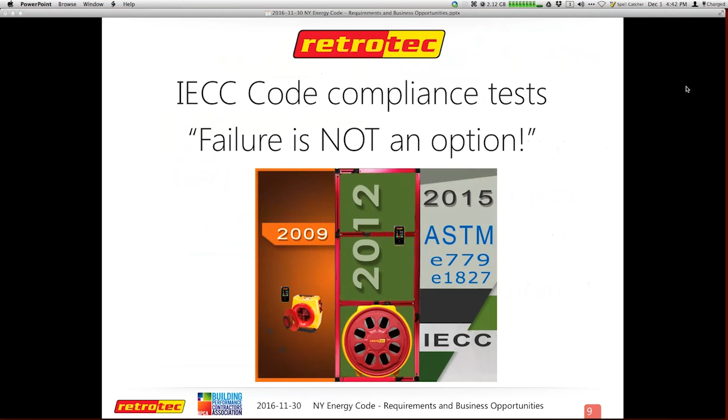Who can perform the test? That's a very gray area and would be dependent upon your code official. What are some of the requirements? How to do compliance, duct tests, envelope tests, and intermixed in that is some air barrier stuff. And we'll talk about how the envelope tightness tests, the blower door tests, are completely different from what you may be doing as a home performance contractor.

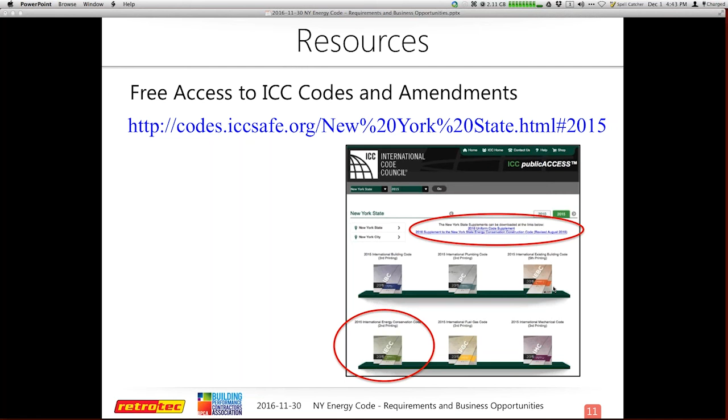If you go to the official ICC, if you just Google ICC codes, you can follow through some prompts. At the top here, I picked New York and the year, and it gives me direct access to any of your codes. So if you're looking for a plumbing code or a fire code, here's your energy code. These are the things that will pop up. And also your supplements have a direct link on this page. It's a nice little resource for you.

This is the most heavy-duty loaded question. I do a variety of training. Actually this morning, I live in Georgia, and we had a code amendment hearing today. I've been to multiple states, and this is always the most difficult question to answer. Only a few states really itemize who these people are - an approved third party. So what does approved mean? And what is a third party, and does any of that actually matter? So this will actually come down to this person here, who is your code official.

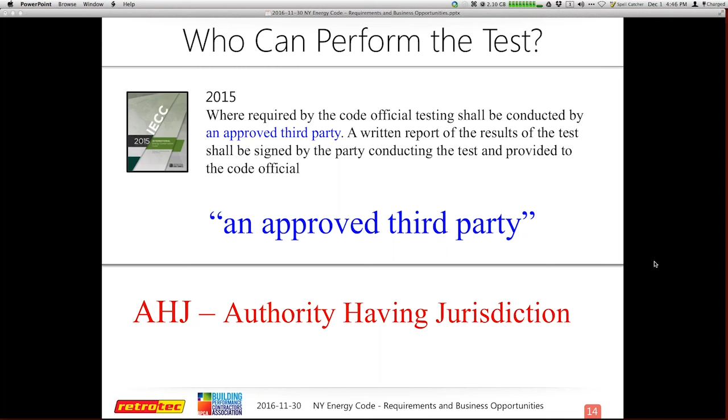All right, so that's actually the one gray area where you want to connect with your building official and find out exactly what approved third party means. There's a lot of places when we get into multifamily concepts where your building official needs to brush up a little bit or be more informed.

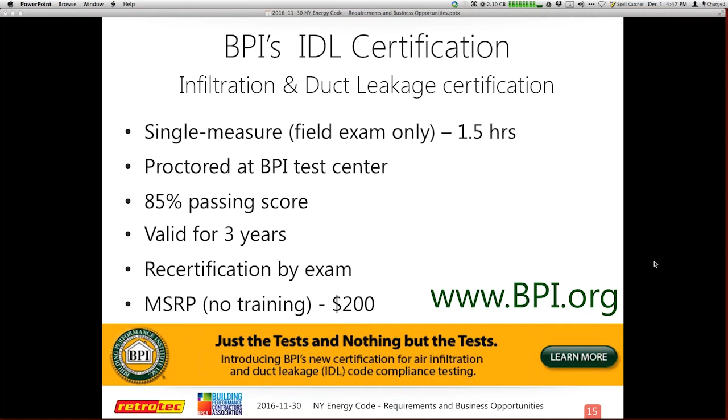One of the most universal ways out there to become a certified individual allowed to do code compliance testing is BPI's IDL certification. Any of the test centers that are out there can do this. I will be up in New York throughout the beginning of the year and throughout next year, offering this for those who need a certification. So any BPI test center can actually do that. So it is an option. It does validate your ability to be technically code compliant, having a certification that shows you can do these tests.

Retrotec does offer this residential, this is the duct tester one. There's also one for blower door. So if you buy a blower door or a duct tester, or if for some reason you have one from a year or two past and you're like, wow, I didn't know you had that, and you want to take the certification course, we can arrange that.

So it takes about an hour and a half, some basic questions, go through a series of slides, the basic online training program concept. But when you're done, you actually get a certification that says, I know how to use this bit of equipment. I do think in the future, this is going to be something that's combined with doing hands-on practical training, and something that confirms you know how to use your manufacturer's equipment.

And it's our goal in the future to be able to try and help provide something that is actually a physical confirmation that you're actually using the equipment, and we can verify that. So coming to a town near you is a follow-up, or the marriage of manufacturer and third-party certification.

Many people are familiar with this concept, but if you're new to the code concept, I want to make sure we understand how the energy code has been working for quite a while, and there's different ways you can comply with the code. And they're described as a prescriptive path. I call the other ones alternative paths.

There's secondary alternative paths when you just get into prescriptive, whether or not you want to just follow the grid, or maybe I want to add more insulation in the walls. I can do a little less in the ceiling. There's a little bit of play even in the prescriptive path, but in general, prescriptive means I do A, B, C, and I follow these sections, R402.1.3. And if I do this exactly, then I actually am passing the code.

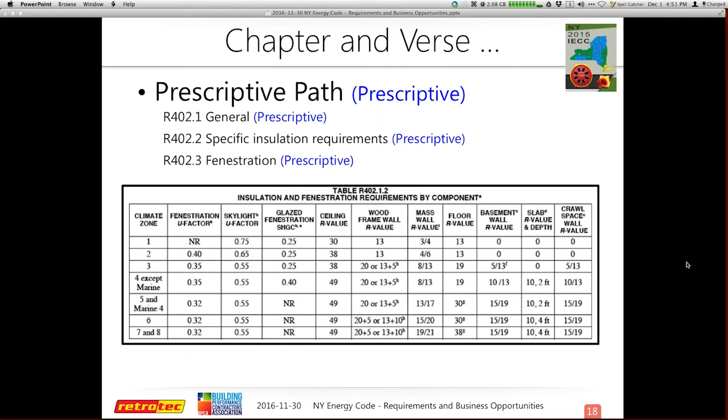This is an example of the prescription that you may follow. This is the prescriptive path, literally the grid. So pick your climate zone; most of you guys are 4 and 5. There may be some 6 in the upper section there, but this is the prescriptive path that you would follow. If I just did my ceiling this way, my walls this way, and my floor like that, then your basement, all those things are laid out, and I can follow prescriptively.

So there's other things that actually show up in the ICC that people always assumed were in an energy code, but are actually either IRC or mechanical code, or your jurisdiction has already overridden this and done something else. So the M is for mechanical code, the R is for IRC.

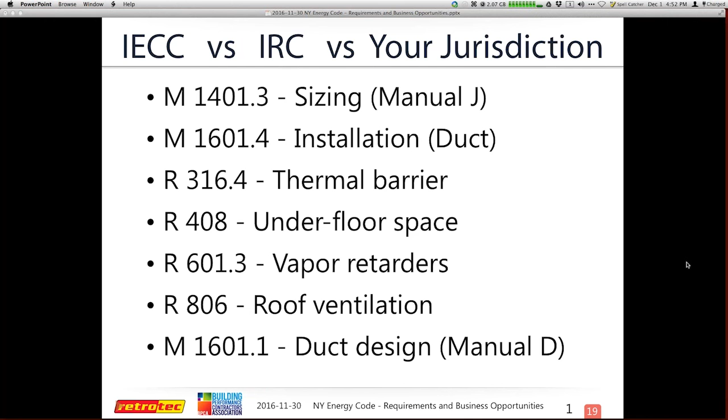So you can see that some of the things you may have thought of as energy requirements are actually in the residential side of the requirements or in the mechanical side of the requirements. The residential usually includes the mechanical as an incorporation, but in general, these are where these are found in subset sections of the code that's outside of the IECC direct code itself.

I'm going to start with duct testing. It's something that some home performance contractors do, so let's use that as a concept.

I do have a couple of polls here. Let me just see if we got something we can reach out to. Let's start with this one. This will give me an idea. How long have you been doing this? So are you new to the industry? Been doing this forever? Some people have been doing it longer. I've been alive, and I'm pretty old actually. So just trying to get a feel.

So someone asked about ResCheck, and as I'm getting my votes coming in, I'll explain what ResCheck is. A free software option that's out there for anybody who's doing energy code. And what it does is it allows you to determine what's the overall U value, or in general R value, for your walls, ceilings, and floors. When you want to follow the prescriptive path, if you want to change it, so instead of doing an R49 in the attic, maybe I want to do an R38, but it means I need to put more insulation somewhere else in the building.

So ResCheck is still out there, and it still allows you to move things around the building. Maybe you're going to go with a higher grade window, and you may do something less throughout the rest of the structure. And that's a compliance path that still is in the prescriptive mode. So that's one of the options that's out there.

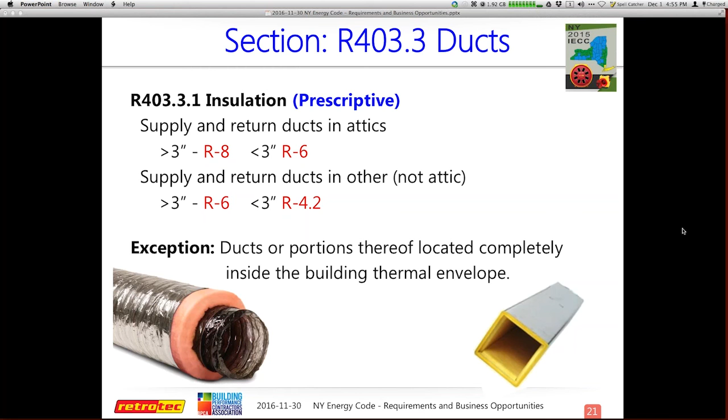So your duct work that's even for your exhaust system must now have insulation, and they describe stuff as being in the attic or not in the attic, and how they describe what R value you have to be and by what size. If you're larger than 3 or smaller than 3, these are the R values. So this was an example of what's prescriptive. So if I follow the ABCs, these are one of the things I have to do for my ducts.

Duct testing is mandatory. All right, so you must test the ducts. All right, but whether or not you're passing with a direct number in the code is a prescriptive option, which means that you don't have to get below a certain number if you're using an alternative path. If I'm using the simulated performance or an ERI, I don't have to have a duct leakage below a certain number. That's actually all incorporated in the software and is done through that path.

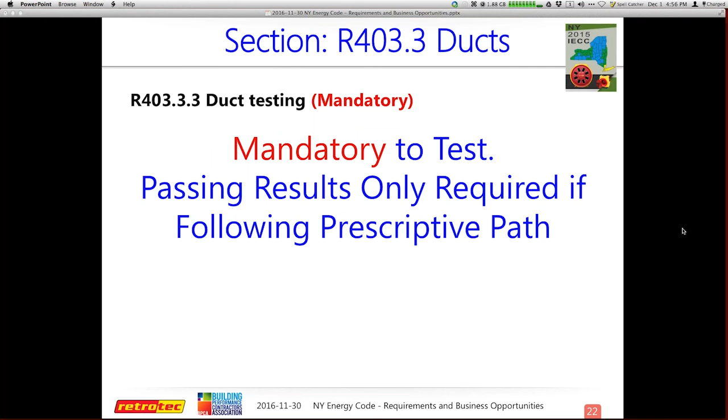But if I am doing prescriptive, I have to test it and be below certain numbers that I have on my next slide. So a lot of people do follow the prescriptive path, and you must have these numbers for compliance. But no matter what, you have to test the ducts. So if somebody says, "Oh, I test them," and they're like, "Well, is it less than 4?" and they say no, you can still pass the code with your numbers being above 4. So it's mandatory to test. Passing is depending on the path that you take.

So my results, if I am doing a prescriptive path, my rough-in with the air handler, without the handler, basically 3 or 4 CFM, or the post-construction test is 4 CFM per 100 square feet. These are common terms that are usually used in the code, or how we describe how leaky something is. You could take out the CFM per 100 square feet and just add a percentage. So that's 4% or 3%. Usually I might say percentage because it's easier to say than CFM per 100 square feet.

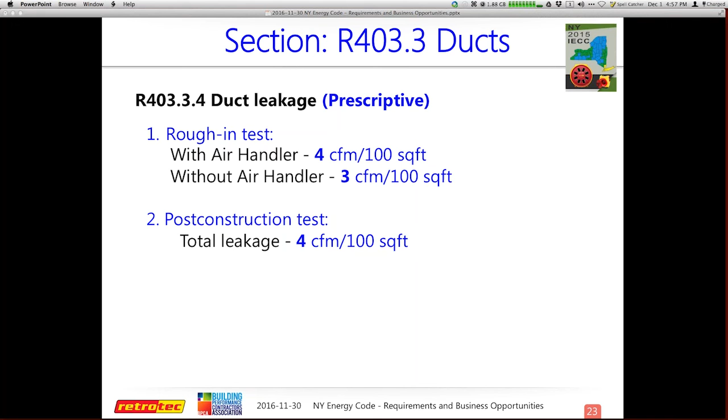But this is the only time where you have to pass this, again, if you're following the prescriptive path for your code compliance. So you may end up with a higher number, but if you're using an ERI, that gets calculated into how they determine how well that house is performing. Any questions on that? Are we all okay on that? So the blower door is a whole other concept which we're coming to.

There is an exception, and the exception is that I do not have to test anything if all of my ducts and air handlers are located entirely within the building thermal envelope. It's not necessarily the conditioned space, but the thermal envelope. So if you decide that you're going to use a spray foam across your roof line, then that's considered to be your thermal envelope. If all of my ducts are inside that area, then I do not have to test it. I still have to seal them. We all recommend that they still be insulated.

The thermal envelope can also be a gray area depending on your code official. So make sure that you understand how he defines the thermal envelope. Usually when the attic is being insulated, usually it's a foam concept, and that is your thermal envelope that they understand that you do not have to test, but don't get caught at the last minute knowing you may not have done a great job of sealing it, knowing you didn't have to test it, and find out you have to do that the day before occupancy.

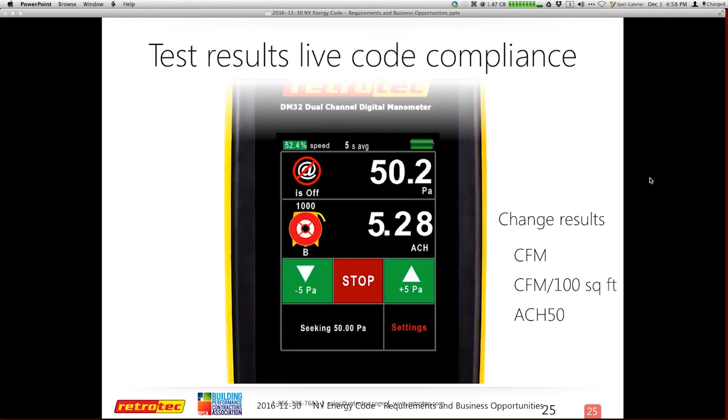Many of the things that we'll talk about, we'll do the code part, and then I'll talk about some of the things that you can actually do with the Retrotec DM32 Smart Gauge. So in the gauge itself, I can get live results. So as I'm doing my test, I can get CFM per 100 square feet or air changes per hour at 50. These are all things that are very beneficial and make your life a lot easier, especially air changes per hour. And we'll go through some of those and how they work.

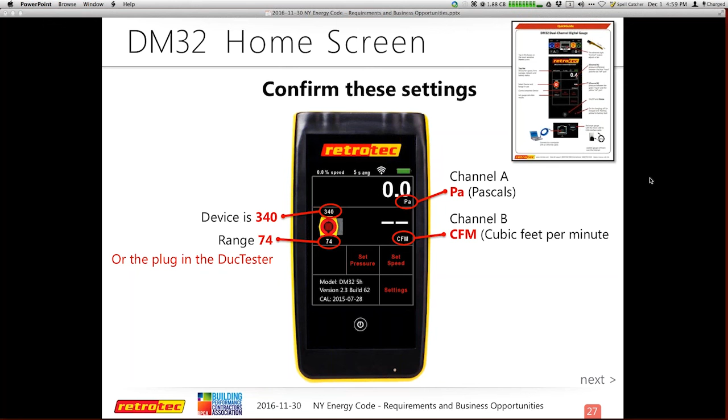So when you turn on the gauge, it keeps your previous settings, and it's as simple as I turn it on. I always want to confirm a few things, that I still have pascals. Nobody else messed with my gauge, but all these things are still there. There's nothing for me to test. I don't have to change a mode. I don't have to tell it to do any type of CFM or enter what type of device. If I did a duct test 3 days ago, then it starts up and says this is exactly what you had when you turned off the gauge. So I always just kind of confirm that I've got the few settings I have.

And to run a test, it's as simple as I hit set pressure. There is a speed control knob on the fans, but for the Retrotec stuff, we just hit set pressure. I enter 25, and after I usually do that, I always turn on the @ feature just as a habit, and I'll explain what the @ feature does to make sure everybody's on the same page. So on channel B, I'm getting my test results at 25 pascals. Sometimes the ducts may fluctuate. Usually they're fairly stable versus the blower door, but here I can actually confirm that my results are 184 CFM at 25 pascals.

One of the ones that's not in the code, but this is an interpretation that's been around for quite a while, is that if I have more than one air handler and system in the house, especially if they're on the same floor, which is common for a ranch home, this was common when I lived in Arizona, wherever air handler one serves, that's the square footage that I'm going to use for compliance versus whatever air handler two is serving.

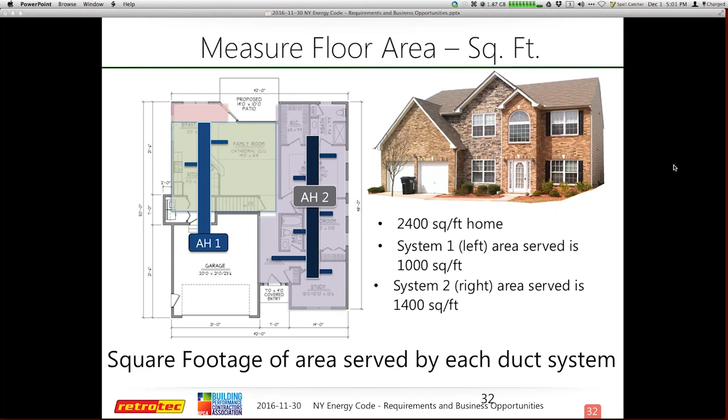They kind of leave it up to the individual for some areas on where the return is. A lot of times the foyer and stair areas can be gray areas. So usually, as long as you make a strong, educated guess, most people aren't going to doubt you. And you can use this to your advantage, because we're dealing with CFM per square footage as leakage. In general, you want to make sure you're not combining the two units as leakage with the area they serve. These are both individual compliance measures, so one may pass and one may fail based on how they actually test.

Here's an example of a post construction test. I'm doing a total leakage test, and I have 107 CFM on my gauge. It's a 2,400 square foot home. So my percentage of duct leak is 107 divided by 2,400, which comes out to 4.5 CFM per 100 square feet. Just to make sure we're on the same page, this is where we get this number of 107.

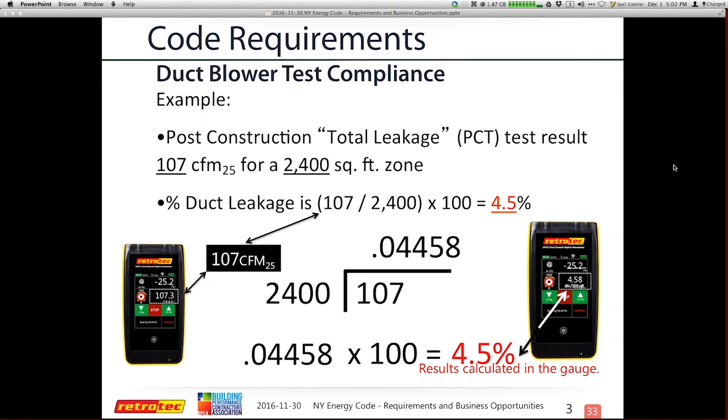It actually comes from the gauge on channel B, and we can do the math. It all plays out, and you get a variety of fractions. You know you're doing the math correctly because it looks kind of funky - the big number is going into a small number, and you always get a 0 point something number. When all this gets worked out and we do the 4.4 and it rounds up, I can actually get this directly from the gauge, as I mentioned earlier - this CFM per 100 square feet. So I can now tell if I had to be a 4, technically I'm not passing. If I had to be 3, I'm definitely failing. So these are some of the ways you can confirm as you're testing what you need to do to make sure you're getting below 4 CFM, or 4%.

I thought I'd show you some of the options that go along with if I wanted to change and get to CFM per 100 square feet, since there's also an area that's involved. If I'm going to use CFM per 100 square feet, I've got to make sure I change the area that goes along with that. One of the things people struggle with is they'll tap on channel B and it'll give you a list - you can see I have metric, CFM per square foot, liters, metric, CFM per 1,000 and 100 - and it'll toggle through each one. Whichever one you want to use is the one that's brightest, and I just hit the home button.

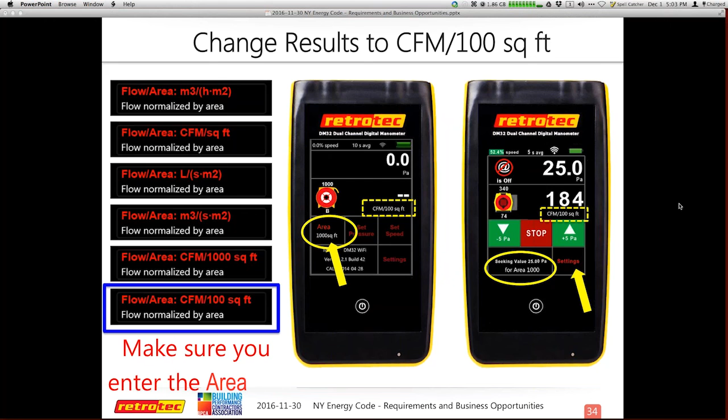But if I'm going to do something that's calculating the area for this duct system, I need to know the square footage of the house, or the area it's serving. So the next thing to do is make sure I'm doing that - I can either tap on area or tap on settings and enter it. You can see it shows up on the gauge either below here when I'm running a test, or right here if I'm on the home screen. It tells me what area this duct leakage is actually being tested to.

All right, I have a series of things that actually show how to do some duct testing. Some of this may be review.

So I'm looking for some feedback here - 4 CFM per 100 square feet. Some people say it's a tough standard to meet, but you have lots of neighbors who've been doing this for quite a while that do well with it. In fact, many folks are getting down to 2 CFM. And if you really want to reduce this, or get it down to something that's a no-brainer, you bring the ducts into the thermal envelope. Once you've done that, you may still have leakage, but they consider it acceptable, unfortunately.

What was it, January of 2014 that Louisiana passed the code and enforced the actual duct testing, correct? Or was it correct - 2015? Yeah, go ahead.

So at that time, for Retrotec, Joe and I had created an online training that was acceptable as a certification for duct training. We used to get a lot of calls from folks, and I remember one day I got a call from a guy in Louisiana, and he was absolutely beside himself because the code inspector he worked with said he was not doing the test right, because he was at about 1 CFM per 100 square feet.

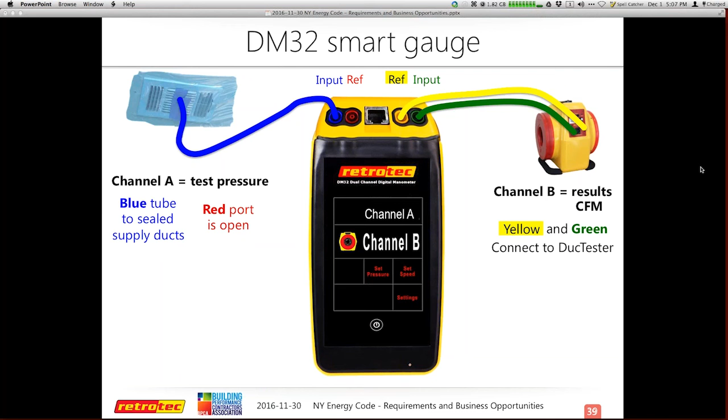Basically, it's a color-coded system that comes with Retrotec. It's not idiot-proof—we keep having more and more better idiots out there—so I refer to it as error resistant. The goal is to make sure that the dumb things we all do during the day aren't happening. We're always connecting green to green and blue to blue, and life goes on a lot faster.

So the rough-in test is part of the code compliant option. I thought I'd go through a few options for you. There is a battery pack that Retrotec sells—in fact, they don't sell the battery pack, but they sell the cord for the battery pack. Jay will probably dig up the link and send that to you because that's actually on their website. You need to get this specific battery pack, and that allows you these options for doing tests where there is no power.

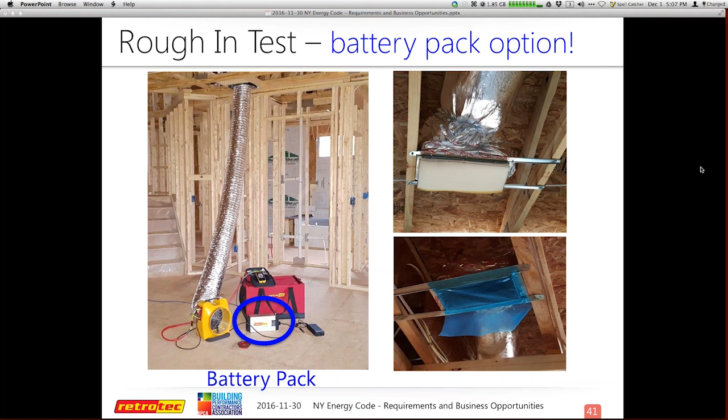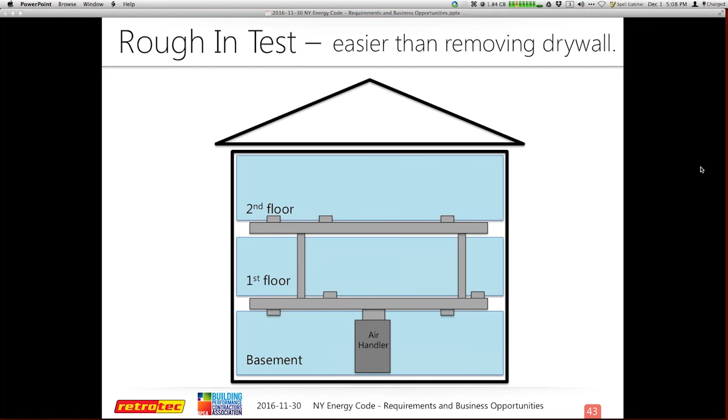And it's a lot easier than removing drywall if you just do a rough-in test. If you have any ducts that are going to be enclosed in the wall or in the floor, you definitely want to make sure you're doing some kind of rough-in test, because this could be a disaster later. If you're in the basement and everything's open, you have access to it. But if you're running ducts up inside walls or across other floors or other areas, doing a simple rough-in test is always a lot smarter than trying to figure out what happened or where your leaks are.

The basic post-construction tests we'll go through briefly. Some of this stuff we've all been living with for a long time. I have to turn off everything else that's actually moving air, any type of exhaust fans.

The one thing that is commonly forgotten is that you really want to make sure that your ducts and the air handler are always exposed and open to outside, and outside pressure is really what you're after.

So if I had a really tight small home, like some of these condos where everything is sealed up so tight, and I'm doing the duct test with my duct tester in the middle of the living room, doing a pressure difference between the ducts and the living room common areas, I'm actually going to alter the pressures in the area I'm referring to. So if I'm trying to show a pressure differential from inside the ducts to the living area, and I'm actually altering the pressures because there's no way to alleviate them, you're going to end up chasing the pressure curve.

So I always want to make sure that I have a window that's cracked. It doesn't take a lot to really alleviate the pressures or allow that to happen.

The same goes if I have ducts in a really tight attic or a tight crawl space, I need to make sure they have the ability to leak air somewhere.

You also want to make sure about garages. If the garage doors are getting really tight now, and my air handler may be in the garage or ducts are moving through that area, I need to make sure they actually have a pressure relief to expose pressures throughout the system and to the outside.

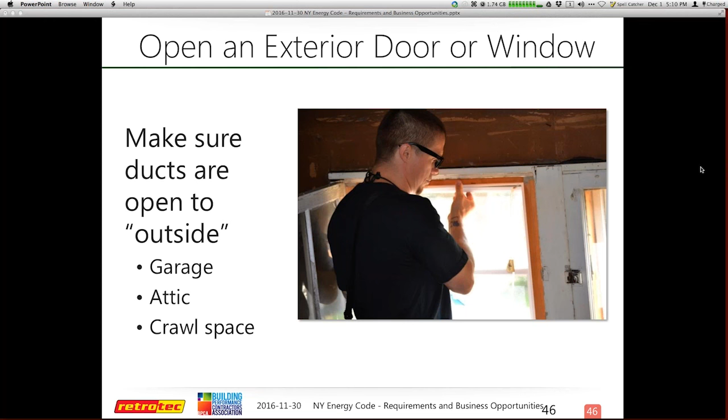It's a common thing that people forget, especially as homes are getting tighter, and this can impact your testing methods. The system could seem tighter than what it really is if you don't allow the pressure relief.

All right, so it's really common stuff here. We're going to seal all the registers. I'm going to give you some options about what to do.

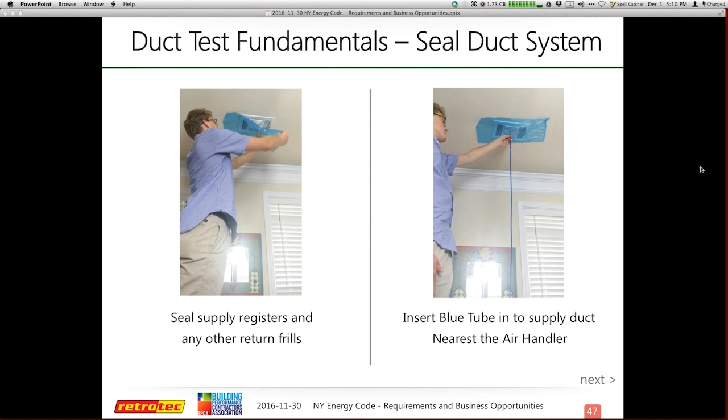The blue tube, or the input tube, will go into the system, into the register that's nearest the air handler, and that's the input. The reference is left open.

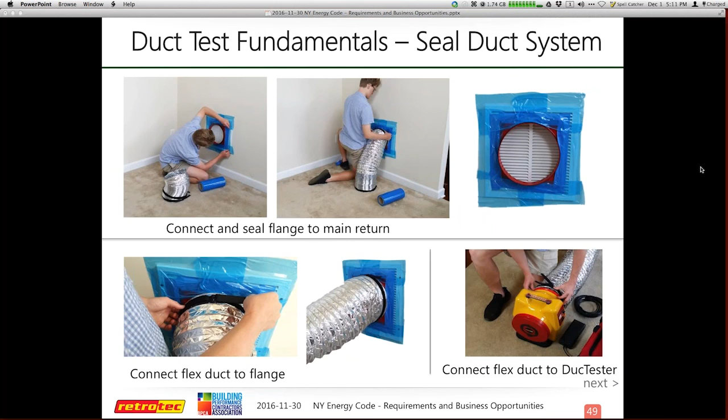So we're going to make our connections, do our seals, all basic stuff here. And there's a new clear flange that Retrotec has, which actually works on Energy Conservatory or Retrotec systems. It'll fit around either one of them. I've checked it on both of their flex ducts.

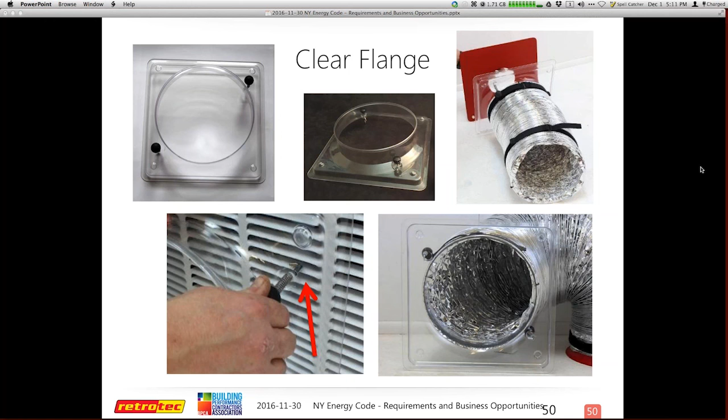But for those of you that have the returns in the ceiling, this is a godsend. Many of you may have already rigged up something that did this, but it's got these push-in clips and it's clear so you can see what you're doing. You can clip it to the actual grill and it stays in place, so you don't have to test as fast as possible before the whole thing comes collapsing down in the hallway. This will keep it in place. You seal it to the rest of the grill like we normally do, and it gives you some nice options in terms of being more efficient and much more valuable in terms of your time.

So we make our connections. Again, this is the Retrotec system, yellow to yellow, green to green. There's a cord that actually controls the fan itself, and we're up and running.

So there is pressurization versus depressurization. I did ask if anybody out there was depressurizing, and I got a few people. Somebody said 'pressure only' in all caps. So I'll explain why I will convince you that you should depressurize. I understand that Energy Conservatory is a little more challenging - there's a flow straightener, looks like a packing material you have to put in, and you have to add another tubing. But here's one of the things that can happen when you only pressurize and don't realize you may actually be having an issue if you don't do both.

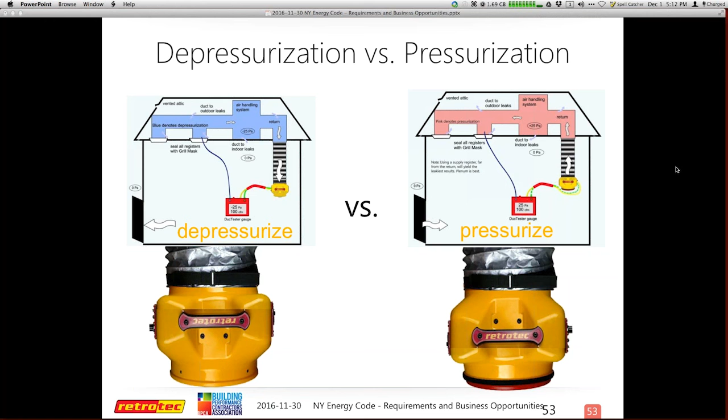So for Retrotec, I just turn the system around. I hit set 25 and go again. Nothing to change. All the tubing is the same. There's no flow straightener, so it's a real easy way to do that. And especially if I've got a 2-story house, I may still pass.

I may still get by with my 4 CFM, or prior to this, you could actually get away with 12 CFM. So it was easy to be like, we passed, but maybe there was more leakage happening than really what I needed to do. Or you may be struggling to find out, is my device that I'm using to seal all of the registers actually working well.

So when you pressurize, little leaks start showing up around the corners, especially if you let it go for a few minutes. Versus depressurization - when I depressurize, all this gets sucked to the drywall, and I get a much smaller, tighter number. We are now struggling with how to get a small number.

Depressurizing can help you make sure you're getting the smallest number possible when you actually do your testing. That's why depressurization can be very beneficial - the difference between 4.5 and 3.9 CFM, because a lot of these little leaks can show up and be challenging.

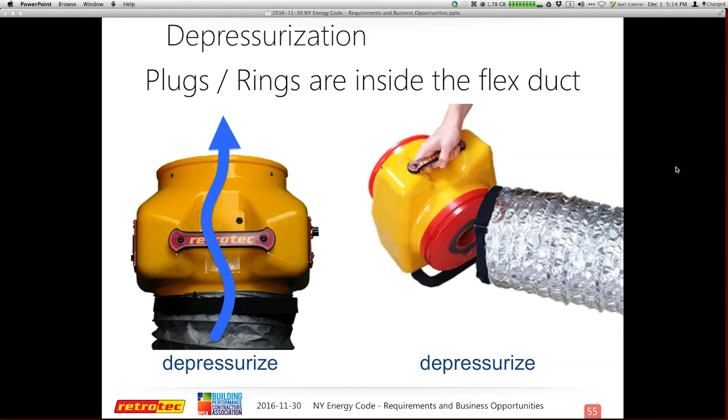Whether you're using Energy Conservatory or Retrotec, if you are going to depressurize, your rings are going to be inside your flex duct. So you've got to keep track of that and make sure they're set up the correct way. I know a lot of folks that do Energy Conservatory forget there's an extra tube to be added, or the flow straightener. So if you're not doing that, then you're missing the actual correct procedure. So if you are depressurizing, your rings or ranges are going to be inside the flex duct.

So the first thing I try to stress to people - I know I have a couple people in California on the line with me that we've gone through this - is that the common tech support advice for both manufacturers is you must reach 25. I must get to 25 pascals, and after that, if I can't get to 25, I've got to open up the ranges and let more flow go through.

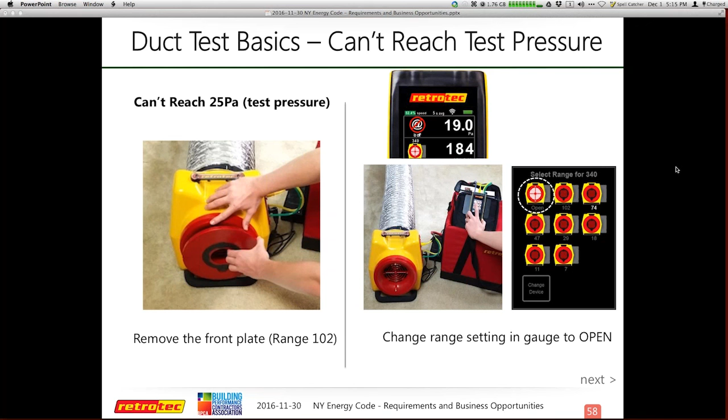So it seems like a lot of people are struggling, like, do I change this or do I do this? Do I have a different setting? You want to make sure that your setting always matches the gauge, and I need to let more air flow through in order to allow the pressure inside the duct tester to have enough to get me a reading and get me up to 25 pascals.

It's the same as a blower door concept. If I can't reach 50, I've got to let more air come through. If I opened up the tester all the way and still can't get to my test pressure, that's when I depend on my @ feature, because I need to compare A to B.

So somebody else comes back and fixes it and we test again. I need to know that I'm always testing to 25 pascals. So the @ feature turned on gives me my results at 25, whether I reach that or not. So the best thing to do is make sure you're reaching it with the options you have on the fan, and then use the @ feature when all else fails.

I always turn on the @ feature just to make sure I'm always staying stable in that range for that reading. But I don't really want to just depend on the fact that I couldn't get to a test pressure just because I didn't change the range.

The other one is some may show low flow, or it'll give me 2 dashes saying I didn't get a reading. That means I don't have enough pressure inside the fan. So I've got to get to 25 first, then I've got to get my reading, and then I'm able to get my results. So if I can't get a reading, then I've got to start making the duct tester smaller.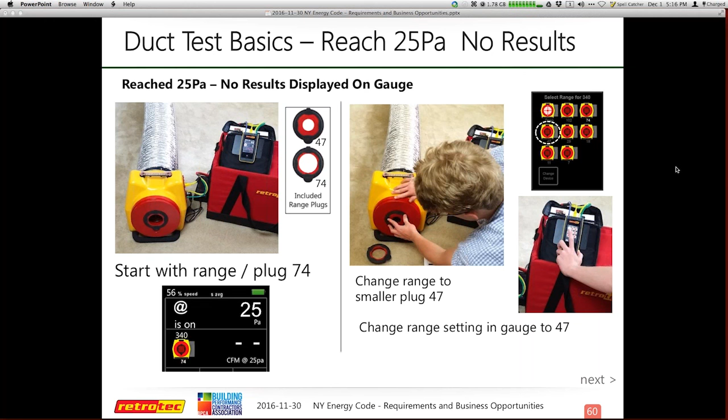Adding smaller rings is always a great thing. The ratio of leaks to the fan to the system is the same. So if I have an open fan, that means I have a lot of leaks, or a leaky house or blower door. So if I have tighter openings on my fan, that means the house or the ducts are also tighter.

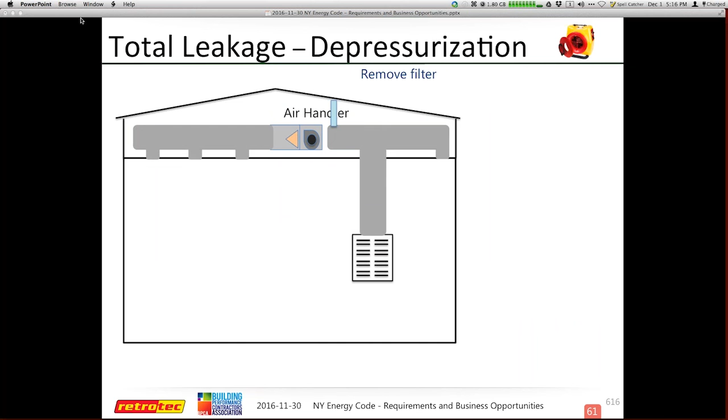There was someone that did point out, or I think maybe it was a question, that the number that you use for code compliance is a depressurization number. Is that Sojo, or is... Oh, that's great.

Right, so the code doesn't care what you do. They just say create a pressure differential, which means you can pressurize or depressurize. Only California and Oregon, I believe, have a requirement for pressurization only. New York follows the ICC as the national standard, and their supplements do not state you must be pressurizing only as part of your test. Same with blower door, you can pressurize the house if you wanted to, but we know we're going to get a larger number because all of the dampers are going to blow open. So depressurizing has your best chance of having the smallest numbers. Great question, the code doesn't care which way you do, as long as you document. I always document which way I'm testing.

Okay, so let's dig into blower doors. This is where things get a little more fun, and our world has changed as we know it. Whether or not your code official will require it, I can't guarantee, but in general, things have changed a lot.

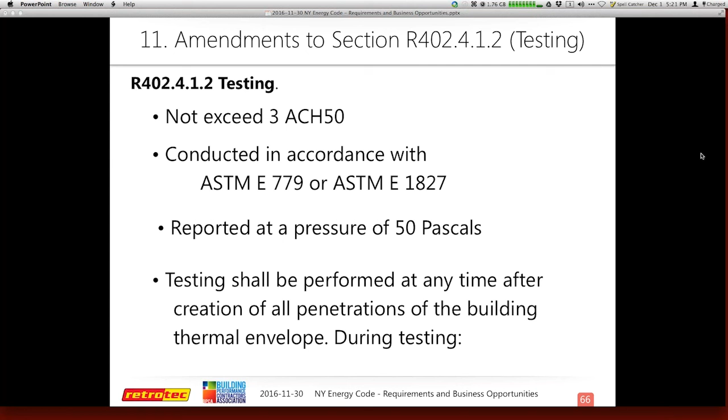But once the home is sealed, especially if you're doing a sealed attic, sealed roof line, I can probably do my test fairly early in the game. In fact, I highly encourage you to do that. If you've got foam insulation in the attic, windows in, and even before insulation shows up, if I'm just fiberglassing the walls or using cellulose, you can do a test. You can get a snapshot as to how close you are, what's happening with this environment. Even if it's just a single point test, it tells you how well you're doing. And I highly encourage you to do that if you're trying to get down to these new numbers.

During the test, it's the same stuff that's been happening for 2009 and 2012. But again, we're going to follow the ASTM standards, which have a few more guidelines about temperature and some other stuff, which I have slides on. But in general, it says, close this, but don't seal it. Close that. Leave this open. So there's nothing that you're allowed to do alternatively to adjust the environment that the environment does not have automatically.

The number one question is, well, the dryer's not in yet. Can I close the dryer opening? The answer is no, because it has a damper on the other side of that. And although we know that the dryer would help reduce any kind of infiltration through that opening, we're mostly testing the damper.

So you're not allowed to artificially cover anything that's not already in place at the time of the test. If there's something that's missing, that's up to you and the code official to determine how to handle this scenario or this situation. But in general, there's nothing that you should be doing to artificially alter the environment just so you can feel as though your number would be more adequate to what it may be once people have actually occupied this house.

Dale Sherman points out that for those of us that think that OSB is an air barrier, which I think officially they say it is, but it can be very porous, especially how much it has been exposed to the weather. So he wants to remind people to be careful that OSB may bite you if you're using that as one of your primary air barriers.

So I think if you're not doing a good job, it will show up. More and more people are doing these kind of tests as regular upgrades right after the home is built. So anyway, I think these kind of things haunt you, even if you think you're getting away with something.

The other thing though, I want to point out too, I talked to builders all over the country about this, and many of them agree that even if you aren't allowed to test your own work, you should have the equipment and the ability to test your own work before that third party person gets there. Because if you're paying $500, $800, whatever, to have your work tested and you fail, then you have to pay for that person to come back out.

So again, I think it's a good idea if you're building, or air sealing, or installing any equipment that needs to be built to code, you should have the equipment to test it yourself, so that you know for a fact when that person gets out there that it passes. And if that person says it doesn't pass, but you know it does, then you actually have ground to stand on. So I think it's important for everybody to be able to test their work.

Excellent point, Jay. I'm sure while Jay was explaining that, you could read through that. Again, part of the supplements is you must be providing a report that has these things. I did highlight in blue as we go from here things that I felt were the key things to read. If you're not going to read the whole slide, obviously, read what's in blue.

So this is the first time that any code has actually pointed out how to measure the building, and it's ANSI Z65. There's several different years that go along with any ANSI code, but then they have an exception saying that the ANSI Z65 is something that a lot of appraisers use on how to determine the square footage for a house.

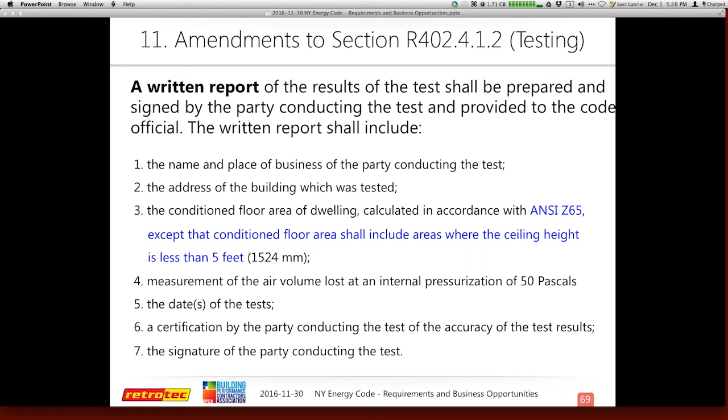So next year, probably in January, February, I'll do something that's built specifically on how to measure a building based upon RESNET standards and ANSI Z65. So that's coming to a webinar near you next year. Otherwise, no other questions. We'll move on. These are all pretty basic things.

Now we're getting into more of where New York has stood out. Many years ago, like 2011, Georgia jumped ahead of everybody, even California, and said, hey, we're Georgia. We're going to do blower door and duct testing. They adopted 2009 with some awesome amendments that say, we're going to step up and show everybody how to do it. And lots of people followed what Georgia was doing, including having this DET verifier, this person who's trained to just be a code tester. And now BPI also has something similar to that. So New York has done the same thing.

New York has said it's really a challenge to measure these smaller units, these multifamily condos, and get anywhere near the air changes per hour. That's just almost impossible to do. The home would feel more like a submarine than anything. If you close the doors, your ears would pop. So those are things that were either impossible to achieve or impossible to live through. So they came up with a much better option, and they went with surface area as opposed to the volume of the structure itself.

I have a couple slides that also visualize this, but the difference is that we're talking about where 2 or more dwelling units are located within the building thermal envelope. A little gray there, so I don't know if they will talk about a duplex that's sharing a wall, the little gray area there. But many of the townhomes may be stacked, or clearly encompassing a thermal envelope that's around the building or the structures themselves. That's actually a clear definition of what we're talking about here.

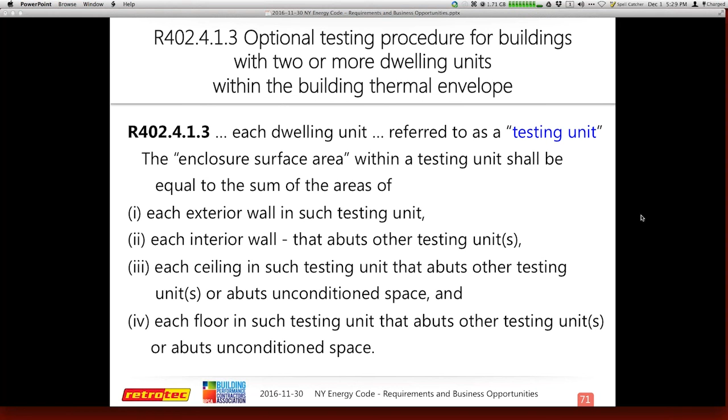Once we start dealing with multiple units inside of a single thermal boundary, they start calling them testing units. And basically what it's saying is that this testing unit will be defined by the walls in the unit that go to the exterior, the walls that abut adjoining units, or the ceiling and the floor that either go to another unit or to the ambient airspace outside. So that's kind of defined. Really, whatever you can see and touch inside of the unit, that's your surface area.

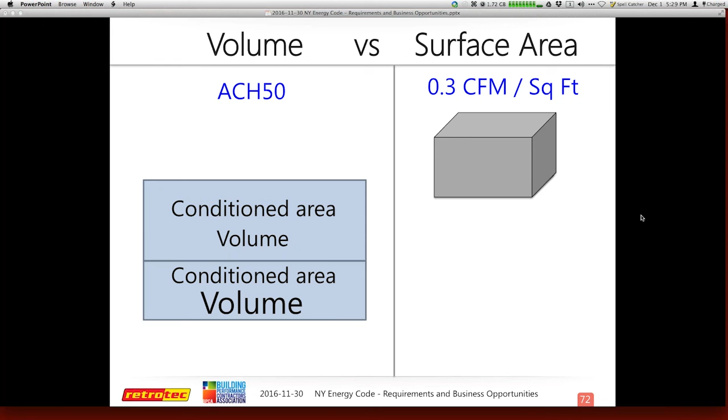It can be a little more challenging to add up, a little more math, a little more writing down on a piece of paper some of the surface areas. Sometimes this may come when you get the layout or the design of the unit. But in general, if you can figure out how to measure volume, you'll be able to figure out how to measure surface area.

So here's the difference. When we're doing air changes per hour, it's all about volume. The more volume you've got, the better you're doing. That's why bigger houses did much better than these small condos. If we're doing surface area, we're doing all of the walls, the floor, the ceiling, all 6 sides. Even if the unit is on a slab, that surface area is counted. So it's not, you don't count only the ceiling and the walls because I'm on a concrete slab. You're counting all 6 surfaces as the area that you're actually trying to comply with.

So make sure we're clear that this is actually testing all of these units when you get up to 6 occupancies. All right. The next slide talks about when I have 7 or more, I have the chance to do sampling. Again, New York has really stepped up their game with all this. So you can go back and test each one of these and do the air changes per hour. You still have that option. This is a Plan B option for you to do the CFM per square foot option.

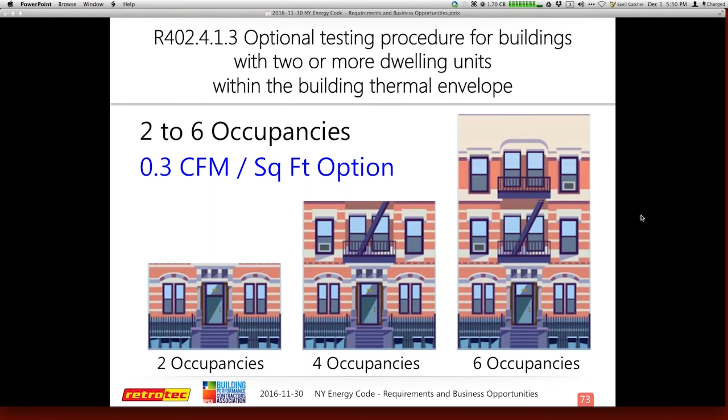All right. So I explained that 2 occupancies, 4, 6. So somewhere between this range here, you can make a decision as to which way you're going to go. Most people are probably going to be doing the square foot option that's there. If you have 2 to 6, you're testing all of the units. 5 units, 4 units, 3, whatever it is, something between 2 and 6, all units are going to be tested. They did realize that we have a lot of multifamily buildings that have an enormous amount of units inside of them. So let's talk about some options.

So when you're starting to do this as the building's being built, or you know you're going to be the tester or you're the builder, make sure your building official understands this is how you want to test, and make sure they understand what are the different types of dwelling units that you're going to be testing as a sample. All this can be very gray, and you guys are the first out there to figure out how to do this and define that.

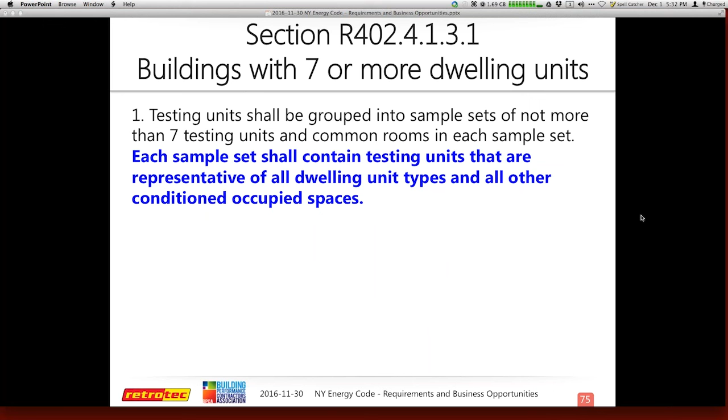So you're allowed to group them into sets of not more than 7. 7 is a common number here. So the dwelling must have more than 7 units, number one, and then I can determine what different types of units I've got that can be grouped. And again, not more than 7 different units or common rooms as a sample set. All right. So let's go through what this might look like.

So I may have a 1 bedroom that's 800 square feet. I may have a 2 bedroom that's 1,300 square feet, or I may have a 2 bedroom that's 1,100 square feet. So right now, these are 3 individual types of units. So let's say I've got 6 of these 1 bedrooms. I can do one of them. We'll talk about what happens if they fail as a concept, but this could be one group.

I may have 4 of these that are 2 bedroom at 1,300 square feet. And that can be a group, but I may have some that are considered to be identical, that I may have multiple, again, of these 2 bedrooms, 1,100 square feet, as long as the description, if you described it on a sales document, is so many bedrooms or so many bedrooms and baths. Let's say 2 bedroom, 2 bath and 2 bedroom, 3 bath are not the same type of unit.

So they may be the same square footage, but they must be considered to be identical type units. They can be flip-flopped, kind of a mirrored concept, but you can't say that just because they've got an extra bathroom, it's the same. They technically want these to be identical type units. They didn't seem to care where they sat on the floor or where they sat in the building. They were mostly after whether they are identical types of units. And again, your building official may have a different concept about how he wants to define that.

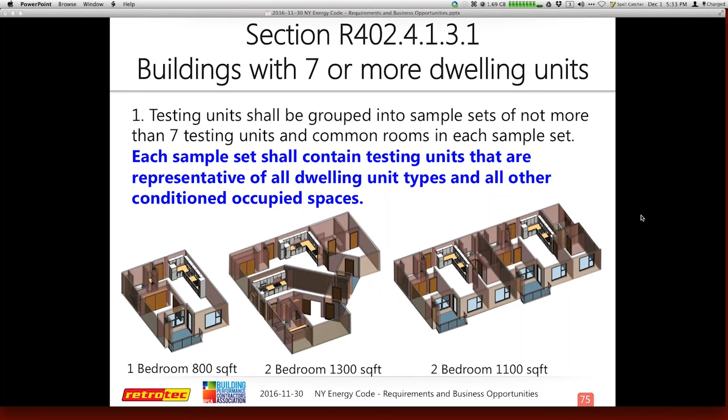So you can't have more than 7 of this one kind. I know 7 keeps coming back. So if I have 8 of this 2-bedroom, 1,100 square foot unit, then I would actually have 2 groups at that point. So there's many nuances. And if I have confused you, then welcome to the club, because this was a challenging amendment that they added. And there'll be some more clarification as this all gets kicked into gear. So hopefully I'm providing some clarification or some better questions to make sure we're all on the same page.

Anything on there, Jay, that I need to make note about? Just got a note from Daniel that said they usually do sample sets based on 1 bedroom, 2 bedroom, 3 bedroom, etc. To confirm with Daniel, does that include a bathroom? So if I could add 2-bedroom, 2 bath, and 2-bedroom, 1 bath, would that be the same? Or how do you guys define that, Daniel? You can let us know in the background.

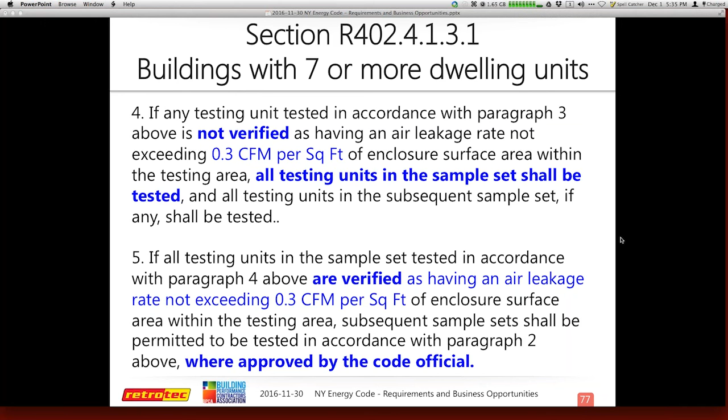All right, so we can keep going with, well, what if? So if any of the tests in accordance with paragraph 3, let's say one of these other 2 fails, then I'm testing all the units, all 7 in that sample. So what it doesn't say here, to make sure everybody's on the same page, is that I need to go fix those other houses, those other units. That's been a challenge with any code that deals with this. Georgia has the same kind of concepts. It says, well, you can do some sample, and if that fails, then just sample more, and then eventually test all of them.

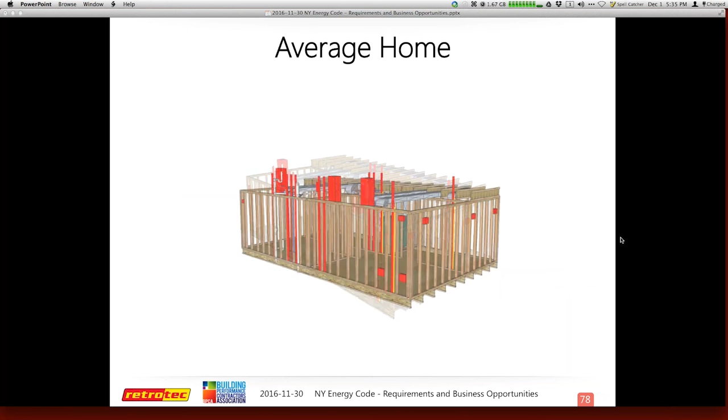But my assumption is you'd have to fix these units to make them compliant. You're just trying to give a ballpark as to, oh, this one failed, but the other ones didn't, that's okay, let's fix the one that failed. But it didn't actually state that. So I would make sure that you understand that just because you fail doesn't mean you get to leave that unit alone.

All right, so this is a home slide that I like to use. We take these average homes, we cut them up, we make Swiss cheese out of them. This is why we're doing blower door tests. This is exactly why we need to be doing blower door tests on more multifamily units that have been put aside or left aside, because there's an enormous amount of leakage that's between units and between floors.

Just to make sure we're all on the same page, according to my sources, you cannot do a neutral pressure boundary or guarded test around these units. Let's say I got a middle unit on the 2nd floor. I test that unit by itself, but I could not add a blower door to the left or to the right or above or below and find out that the leakage outside is one number, but leakage to the adjoining units is something different. This is total leakage. Wherever the unit leaks is considered leakage, and that's part of how your blower door test is done. So you cannot neutralize or eliminate adjoining unit leakage.

So anything that leaks out of this unit is considered leakage to the outside. I want to make sure we're all clear there that you cannot do that. This is a single compartmentalization test, not something that I can actually neutralize with the units next to me. So based upon that, and these kind of illustrations of the leakage we're going to have, we're going to do a much better job of sealing the units that are adjoining next door and above and below. I did several tests out in New York with some of the folks out there, and the leakage from side to side wasn't that bad.

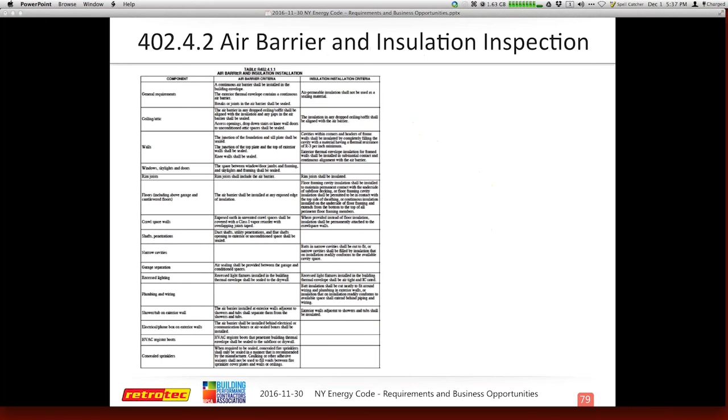It's the chases that are put into these units that are just a massive air leakage source, where you can actually feel the amount of wind that flows through the entire structure because these chases are open to every single floor. That's how they're running the bathroom, the conduits, the electric and low voltage wiring all the way to the roof. Those are the major killers that I predict you're going to see, how do I compartmentalize and separate this unit from all of the chases happening between each individual floor, so that we can eliminate the Swiss cheese effect that we have in all of our units. This is one of the ones.

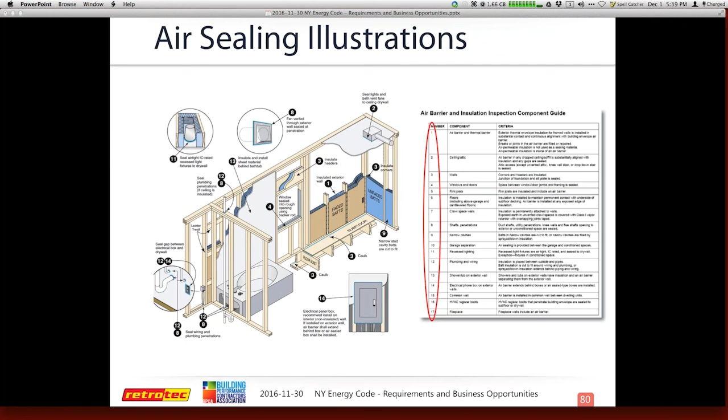The one on the right is from 2009. Southface has these awesome images, and Jay doesn't have them—I have them ready to go, and I can give you some of the links to these. So Joe, I actually got them in there. Oh, you did? Okay, right. Yeah, well, you get 2 copies now. You have 2 copies in there. Jay, you're too fast, buddy.

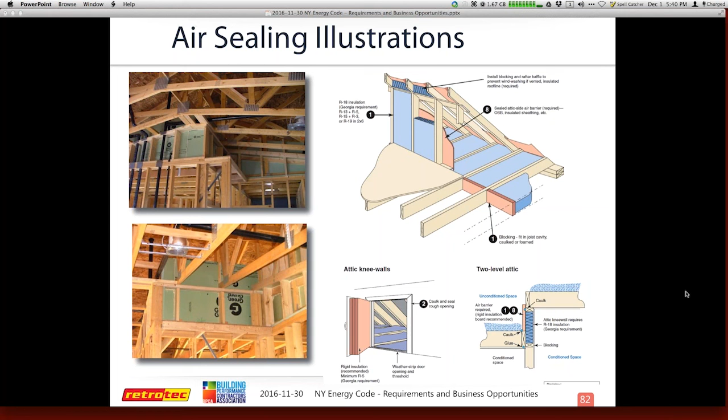So these are your air sealing details that go along with the checklist. The checklist changes from year to year, but if you want to give this to a builder, or use this as your own concept of a checklist, it's a great resource. People that follow this checklist with itemized numbers have a high success rate of passing, especially if they're not used to doing blower door tests or making sure all these things go through.

Again, it does a nice job showing different things between knee walls, what's changed in terms of the insulation—it has to be touching all 6 sides. That becomes an air barrier. All these things make a much more efficient, much more comfortable home when people are actually able to visualize them. One of the things I've always been frustrated by is not being able to visualize what the contractors need to do.

So they also have a field guide that goes along with this. These are made by Southface, but under a federal grant, which means you're allowed to use them—it's okay to hand out these pictures or use them in your marketing, in whatever way you want. That's one reason Southface made them, so more people would build better buildings to be more successful. So don't hesitate to use them. I try to give them credit whenever I can, but in general the field guide and these illustrations are an awesome resource for everybody to use as needed.

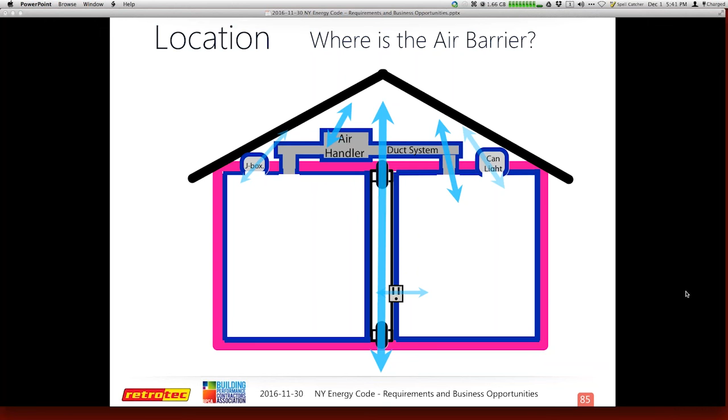I'm going to skip through some of these quickly. This shows why our air barrier isn't just the drywall or OSB or other hard surface products—our air barrier becomes anything that penetrates it. Drywall is the most common air barrier we have, and as soon as your air handler or can lights penetrate it, that actually becomes the air barrier. That's why it's crucial to make sure your duct system is sealed or brought into the thermal envelope. The best way to have a tight, well-ventilated structure is to reduce the amount of penetrations in the air barrier itself.

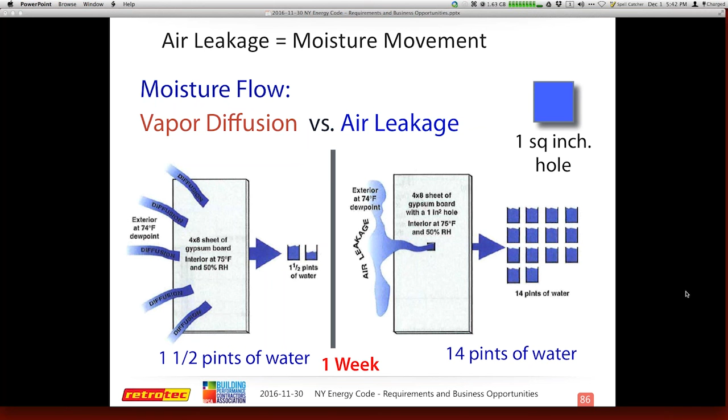In one week in a southern climate, I've got 1.5 pints of water, which is a fair amount. A 1-inch hole leads to 14 pints of water. And if you're dealing with durability issues, you're dealing with comfort issues. If you extrapolate this to northern climates, that may be more like 30 pints over a winter or summer season. But that's still an enormous amount of moisture issues that happen just from a small amount of air leakage. Most of the homes you're building or being code compliant still have a 1.5 to 2 foot opening. If you added up all the leaks and gaps and cracks around the house, you still deal with a huge opening that may feel as though this house is really tight.

Passive houses have more like a softball or hardball size opening, or much smaller. Maybe you can get down to 2 square inches, but you have an enormous amount of effort to get to those kinds of really tight homes. So in general, a code compliant house can still easily have a 1 foot by 1 foot type opening.

Speaking of openings, we have a question. What is the max ACH50 number, or the allowable amount of air changes per hour at 50 pascals, in the New York code? 3 air changes per hour. Thank you, yeah, 3. Thanks Stephen and Dale. Too many numbers in one webinar today.

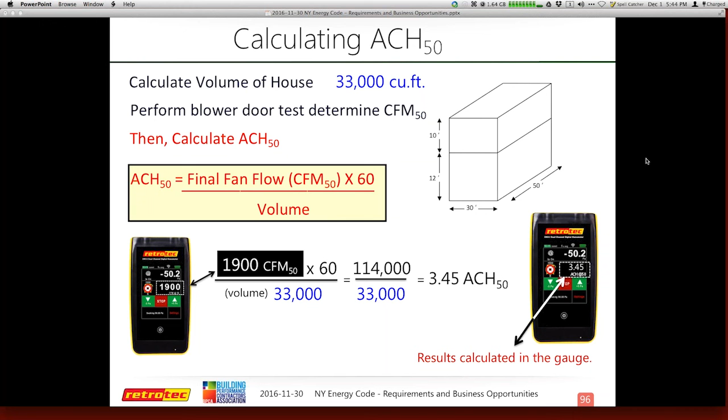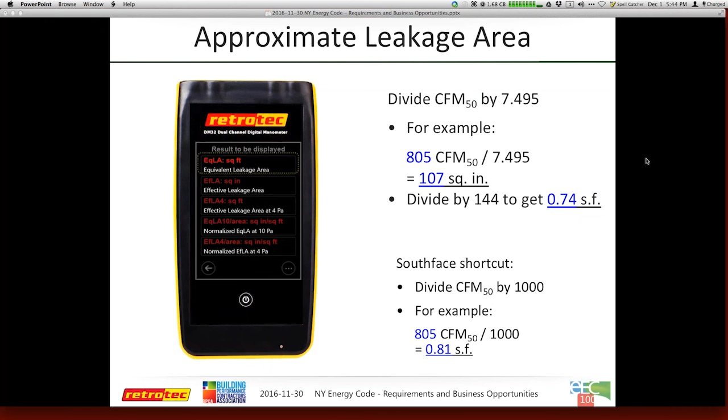Doing the air changes per hour calculation, which is for the single structure, single family type home - these same calculations can be done in the gauge. This is why I got attracted to Retrotec, because I could do a ballpark in my duct leakage, but I could struggle to figure out my air changes per hour in my head. You get a feel for it after a while, but in general I can be running a blower door and say, oh, we passed, oh no, we didn't pass. So right here, I am struggling to pass. I do have an opinion about 3 versus 3.45, not to exceed 3 - I don't know if 3.45 technically exceeds 3 because I'm not at 4 yet. These are all things that are very vague and have yet to be resolved. You may say, well, I'm above 3, and that's okay by me. Yeah, and it's easy to get those in the gauge.

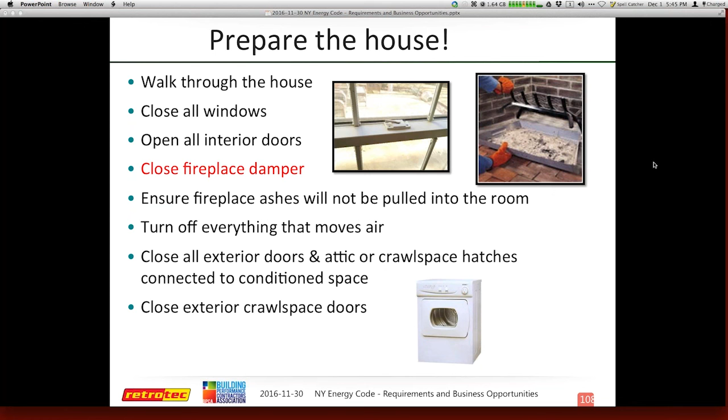I'll kind of flip through some of this. I have some things about the ASTM test that I want to get through. You can determine your estimated leakage surface area in square feet or square inches in the gauge also. So these are all great things that many people wonder - well, how big is the hole? How much leakage do I have? Again, the gauge can actually do all that stuff live while you're doing your test.

I'm going to skip through the baseline stuff. A lot of this is done, stuff we've been familiar with. I felt there were so many people that were familiar with what kind of testing they were doing or how some of this stuff gets prepared. The one thing I will tell you is even on a new home, I still want to encourage people to go to the attic, check out the duct system, or at least the garage and the crawl space, because you never know what's behind those areas that you were not aware of.

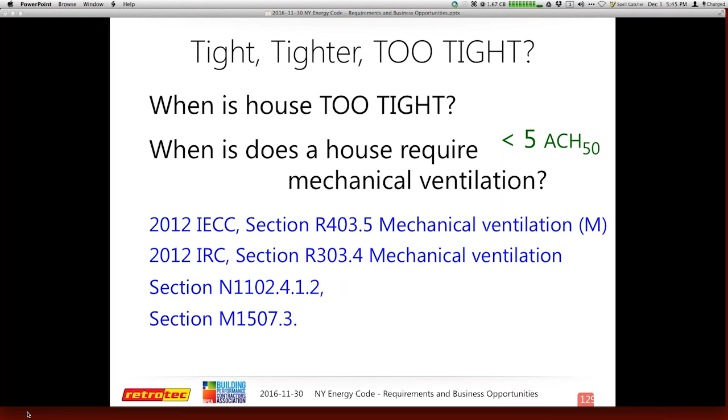So you are now also in the age of mechanical ventilation. No matter what you do, you require mechanical ventilation because anything less than 5 air changes per hour requires mechanical ventilation. Does the code say you have to have mechanical ventilation? No, unless you're below 5, and you have to be 3 to pass. So in theory, you always have to have mechanical ventilation. This is mostly in the IRC and the mechanical code where it's stating that. So once you're here, you now have mechanical ventilation. There's a whole other webinar series that's just on mechanical ventilation, but in general, that's out there.

You also should be required to do manual J. How many folks out there are doing manual J? I know it's a thing that some people do - some people live by it. A manual J can be done now online with a Google search, where it'll actually look at your house, determine your square footage, and give you your manual J calculations. It's pretty amazing how far we've come.

So I thought I would give people the idea that I'm going to do my Manual J before the house is built or while it's being built. But you should really be using real blower door numbers. So I did a reverse calculation to let people know that in general, these are the kind of numbers that you would get if you use just these presets.

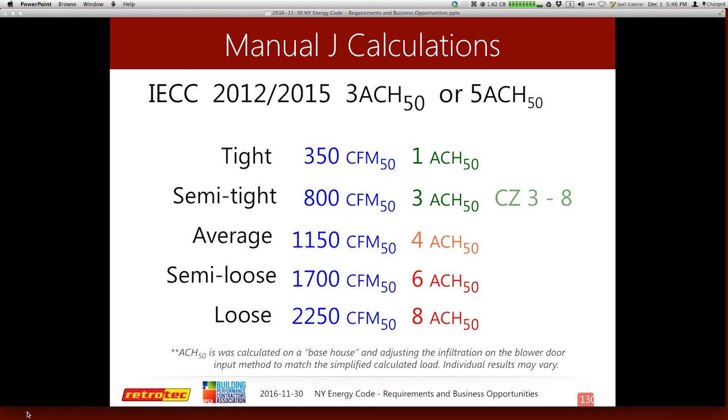If I use tight, semi-tight, average, those are the kind of numbers that would be calculated on around a 2,000 square foot home. I did a larger home, a smaller home, and I took the home and moved it around the country. So in general, these are the kind of numbers you get, and they come into these kind of numbers.

So for you, if you're going to do a Manual J, you should be assuming that your home is going to be semi-tight. Some people just go, well, I always use loose just because it's a safe thing to use. You're actually going to be overestimating your infiltration and causing a much larger, probably at least one size, if not two, of the potential furnace size you might be looking for. You may be upgrading significantly.

So if you're doing Manual J, in general, you should be using the semi-tight as a ballpark function because you don't know what your blower door numbers are yet.

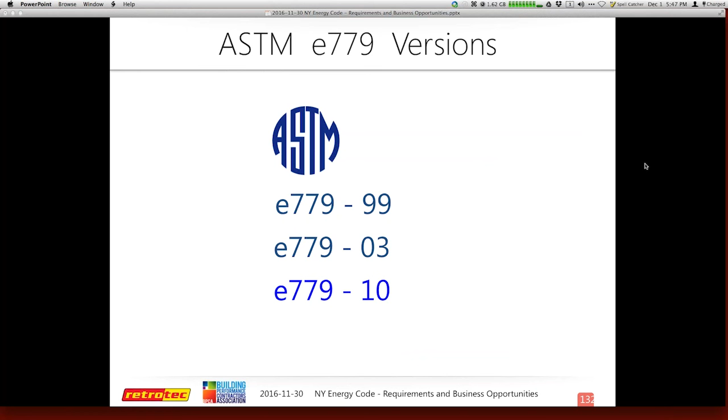Okay, let's dig into the 779-1827 conundrum here. If you're going to go Google ASTM E779, you would find lots of older versions that are incredibly different. They are not minor changes. 1999 is one you can find a lot of, as well as '03, and they have very significant different requirements. So if you're going to do this, make sure you're working on E779 2010. Otherwise, again, you'll be doing stuff that you never needed to do.

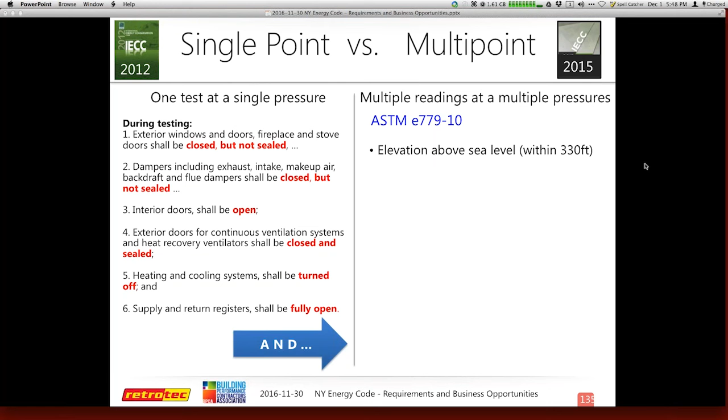Don't put it into a corner where the wind could be increased for your baseline measurements. A single point, which is what many of us are used to using - these are what you have to do. For the multi-point, there's a whole different concept in terms of what we have to do. We still do these, right? Because they want to make sure that ASTM spelled out that you should be doing these things that are part of all their tests.

But we need to have elevation. You need to know what your sea level is. You need to measure your indoor and outdoor pressures. On the windward side, there's a pre and post baseline. They get averaged at the end. It's not something you keep as the baseline in the gauge itself.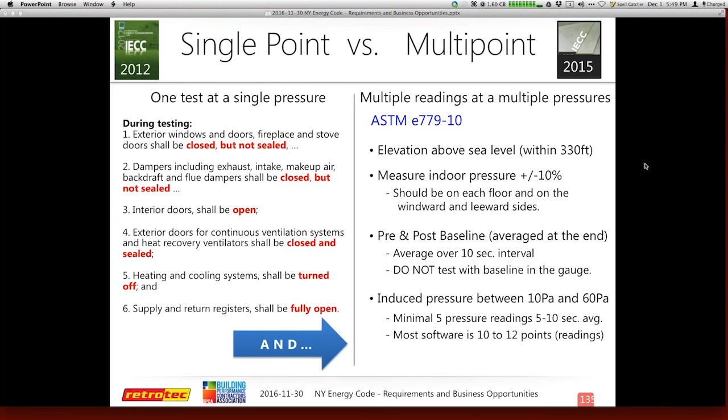Your induced pressures go between 10 and 60 pascals, so it's a multi-point test. Most software goes between 10 or 12 points in terms of its reading. You have to have at least 6, I believe, a minimum of 5 readings. Most of the software by Energy Conservatory or Retrotec does many more readings because you get a much better result when you have more numbers to average.

So here's an example of some of the challenges. Even if you're going to do a single unit on, let's say, the 12th floor as part of your sampling technique that goes along with doing a unit that has more than 7 stories, this still comes to be part of that. You must still follow the 779, and it says that your temperature difference from inside to out times your building height in feet cannot exceed 1180.

That's just the number. So if I have a 25-degree temperature and I've got a 40-foot building, I'm already at 1,000 foot-degree temperature. So for those of you dealing with larger, taller structures, and you may be doing this in colder weather, then you need to be selective as to whether or not you get an override by the building official as to whether you can do this, or you're going to have to come back another day because it's too cold outside.

So these are some of the challenges. I have the feeling that these things will get kind of revamped or rewritten or worked out in terms of the requirement. I don't think everybody knew the nuances of 779.

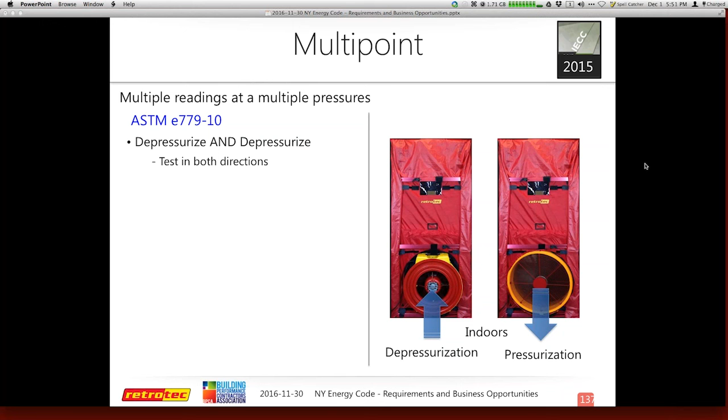So at the bottom it could say you failed, or you passed everything except the temperature and height requirement. We no longer have the option to just ignore things because the software is trying to make sure it encompasses all of these types of requirements. It also says you must depressurize and pressurize - it's actually in the code itself for 779. Again, not something a lot of people will be doing, but it's the nuances you should be aware of, and make sure you understand what is required versus what is acceptable by your building official.

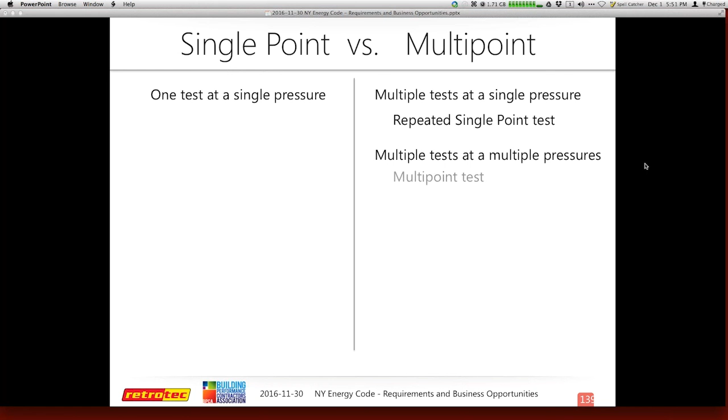Why do we deal with multi-points? What's the point? A single point is really just a quick snapshot. The difference with repeated single points or multi-point tests is that the more data I get, the more chance I have of being accurate. So ResNet has a multi-point test.

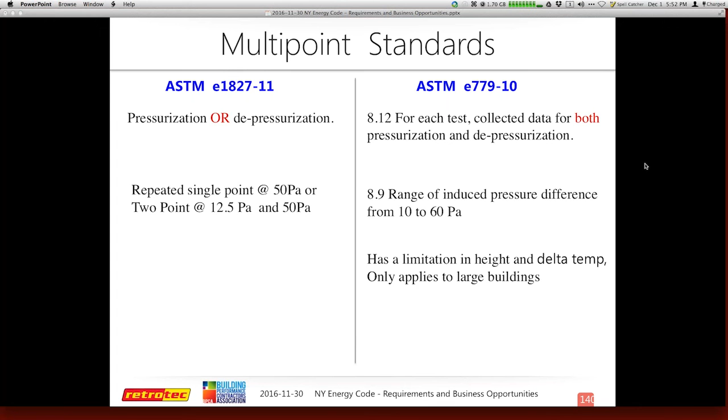There's several versions - ASTM, U.S. Army Corps, NEBB, and ABAA all have different versions that are based on E779. 779 has some issues, so everybody else said, let's make it better. NEBB and ABAA both adopted that. One more that's not on here is the ASTM ResNet ANSI standard called 380. I think that'll be incorporated into everybody's testing standards fairly soon, because they did one more job of saying, let's get rid of the frustrating things that 779 has, but we like their math. So a lot of these things are being resolved and brought up to date.

So here's some comparisons between 1827 and 779. The reality is there's a bunch of calculations that have to go into this - air density, dynamic viscosities, and just a bunch of stuff that, for most of us who have a gauge and a fan and can find leakage and fix it, this stuff is for an engineer.

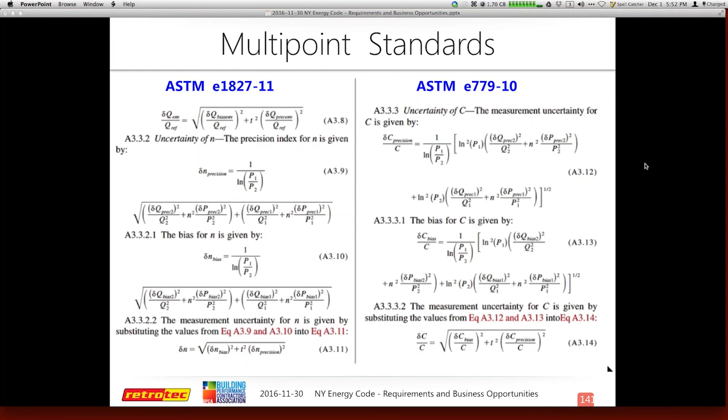And here's the math. If this is the kind of math you love doing, then clearly this is the kind of stuff you can figure out how to do with your spreadsheet or Excel. But in general, the software does it for you.

One of the software packages out there is Retrotec, which has a thing called rCloud. It works on Windows, and also works on Android devices. We're working on Apple - I know many people have Apple. We're hoping for early next year to do beta. If you have an Apple device and want to do beta testing, reach out and let us know you'd like to do that.

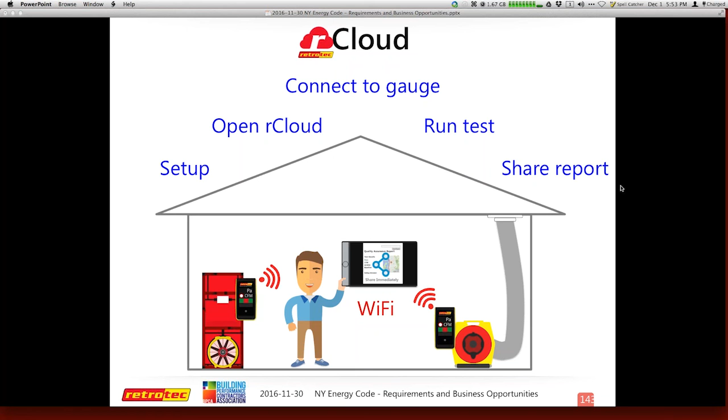You can download this app right now for Android. It's still kind of in a beta testing version with Windows, but in general, you're able to run an ASTM test on your phone or tablet and get all the results you're looking for. We feel this is going to be a change in how people do code compliant testing.

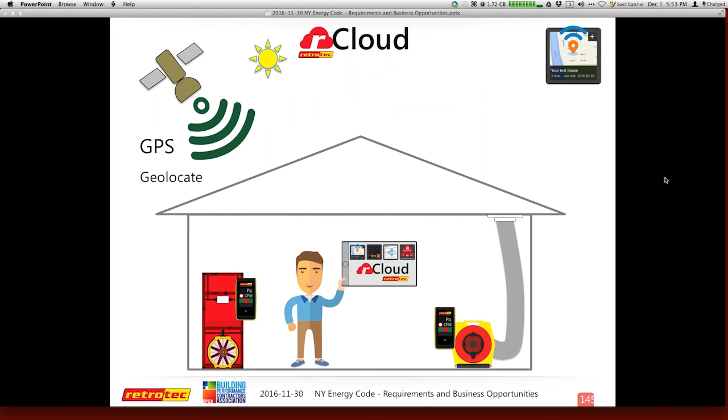Whether you actually have internet or not, it still will always work because you're always connected to your gauge with Wi-Fi. But if you have these other features, it will do a great job of updating and sharing your information, or just recording it and letting you update it later. If you have LTE, you always have geolocation property, so it can always tell you where you did your test and who did it and where. These are the kind of things we think the industry is looking for, and will make a great supplement. So even if I don't have any LTE, and I'm in the middle of nowhere, I still have a GPS signal on my phone or LTE tablet, and I can always determine by latitude and longitude where I did the test.

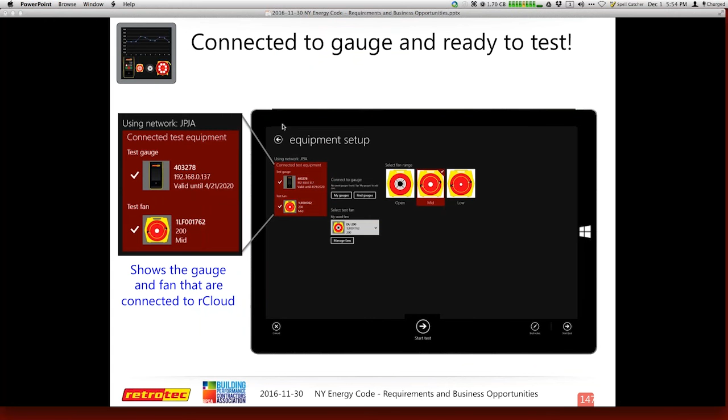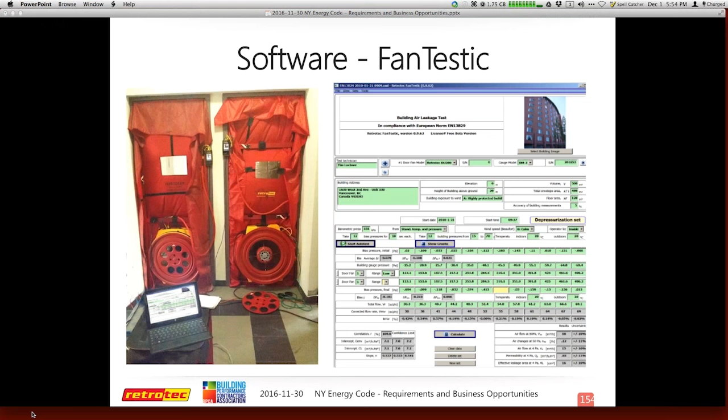There's a couple other software components out there. You can also go to Retrotec and look at some of their other software options. FanTestic is one that's out there that allows you to do your automated testing by merely saying find my gauge, similar to rCloud, but it does all the nuances. This was designed more for a large building or multiple fan concept. This is out there, and you can use this as a concept - it has a free version for 30 days, or you can upgrade and use this.

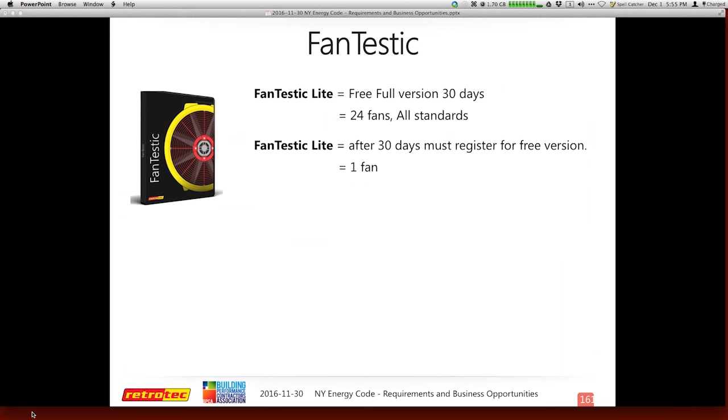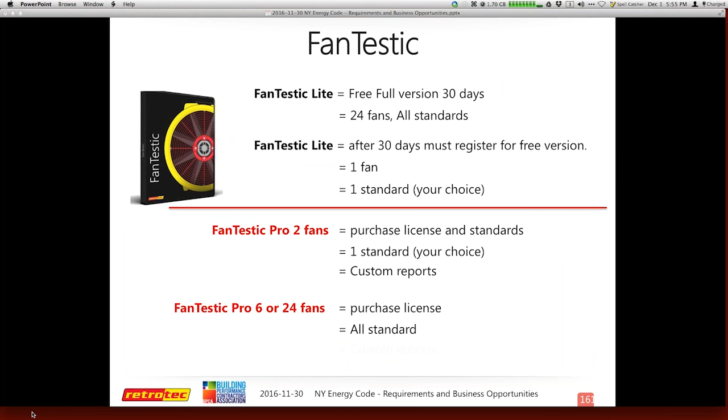I do think rCloud will be something that kind of replaces this, as maybe more of a large building type of a procedure or option, but want to make sure you knew what your options were that are out there. TECTITE and TECLOG do things that are very similar to this, and they are free. I found it a little cumbersome to use that software in general, but there are options on both manufacturers that do this. And there's a variety of stuff that actually control your blower door or duct tester remotely, so you don't have to be exactly where you're testing.

So I can actually be doing my CAS test as an example. I can be upstairs and have my gauge downstairs and actually go around and run my CAS test. So these are things you can also use for Apple directly right now, or Android version. This does not work on a PC. This is more of a tablet type of a phone software.

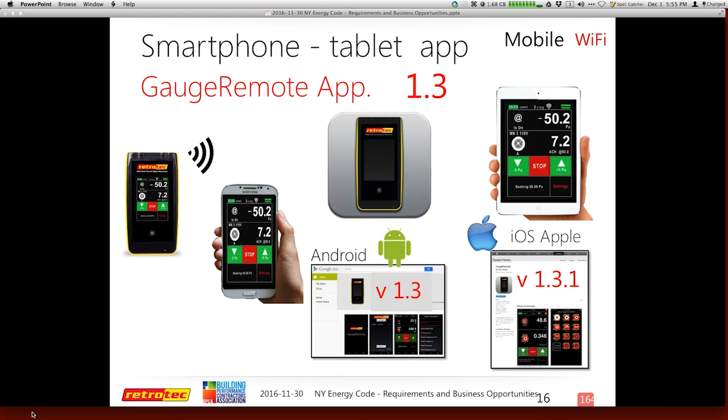All right, Justin, whenever you get caught up, let me know. I've got a few important questions for you. Okay. And yeah, let me know when you're ready.